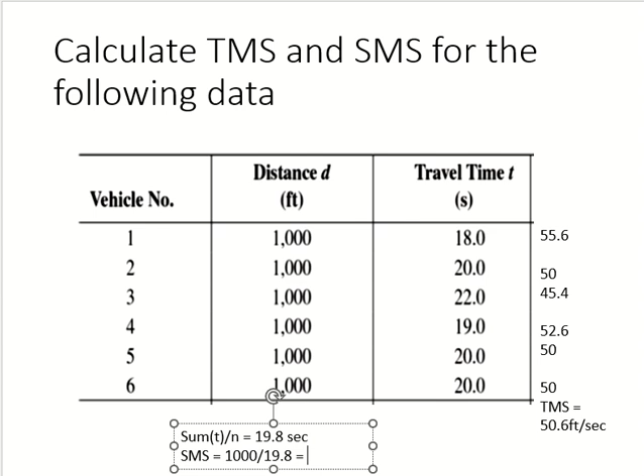How much is this? At last. Yeah. Okay, then SMS is distance upon this value, which is how much? 50.43. Okay, any problem? Any problem? Picture is clear, huh? Very good. This could be one of the problem.

Okay. So you see here, one of them is higher, the other one is lower. This is default. Okay, which one is higher? TMS is higher, right? This is default. TMS is always higher. Okay. Which one I said is at a point? TMS. Okay. So it's supposed to be higher because SMS considers the entire section. It is supposed to be higher.

Okay. Now, here you see for SMS, we did the summation of time upon n, right? And then we did distance upon that value, right? How much is the distance? 1,000. Why did we take 1,000? Because, yes, all vehicles have the same distance, right? Same section. Okay, yeah, it's the same section.

But for TMS, I can give you any distance because for TMS, for every vehicle you will calculate the speed separately and then you will do the mean. So this one can be 1,000, this one can be 2,000, this one can be 900, 500, anything, right? It doesn't matter because everything is going into the equation. Okay?

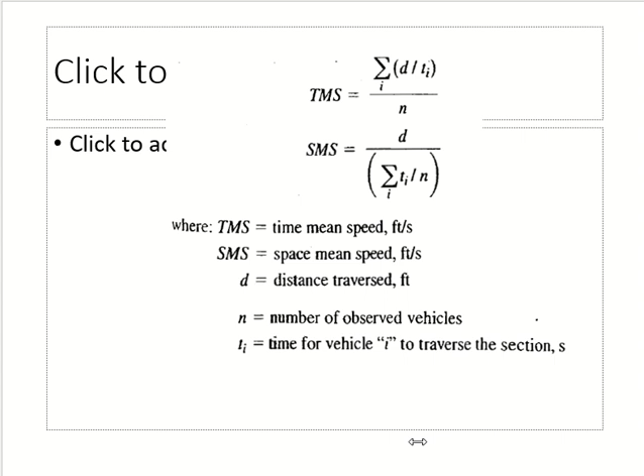Whether you are doing the first method or the second method, it should give you a different answer, although the values are same. N is same, t is same, d is same. But just flipping, doing average first and then summation, or summation first and then average, should give you a different answer. So here it is because of the equations we are using, but practically SMS should be lower, TMS should be higher because of the variation of speed in the section.

Clear? There is a case in which both of them can be exactly same. What is that case? That every vehicle from start to end maintains the same speed. So the first vehicle is 55.6, right? From 0 feet to 1000 feet, at no point it goes above or below this value, and then all vehicles do the same, then both these values will be exactly same. Clear?

If it goes above what? The speed or the distance? Whatever speed it started with, it does not go above or below. It just keeps the same value from start to end for all vehicles. Then the TMS and SMS can be exactly same. Otherwise, there is no other case. Clear? And which one did I tell you was higher? TMS.

Then we come to another macroscopic parameter, which is density. How do we define density? Give me the definition of density. Mass over volume, right? So, for traffic, our mass is vehicles and our space is road. So instead of mass over volume, you would say vehicles upon length of the road. And the length can be in kilometers or miles. So, vehicles per kilometer or vehicles per mile.

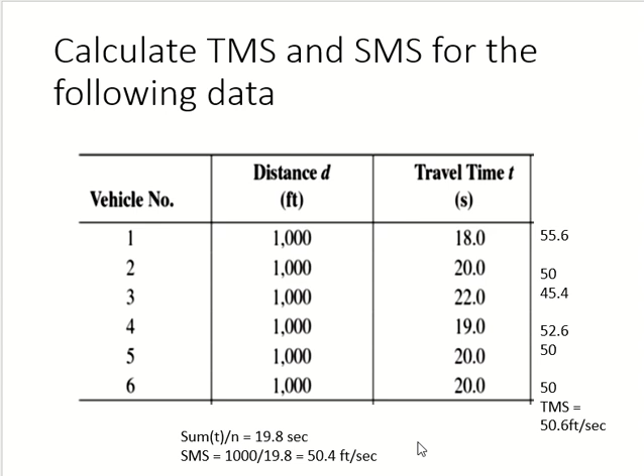Which microscopic parameter we discussed? We did one example, right? In the example, we calculated what? The speed of each vehicle, right? So these values, 55.6, 50, what is this? The speed of one vehicle. So this is micro. Which one is macro? So until you did this, these values are micro. Clear? So speed as microscopic is already covered.

Now we are moving to the second one. Speed is the only parameter we will cover for one vehicle. The remaining 2 which we will discuss now are for a pair of vehicles. First one is spacing and then headway. Both of them are for a pair of vehicles. Now what do we mean by a pair? Pair means 2 vehicles in the same lane following each other.

So 2 vehicles going together side by side, for traffic analysis, is not a pair. Clear? One vehicle is going, then we have a truck, and then after the truck there is another car. So the pair can be the vehicle and the truck, or the truck and the car. It cannot be this car and that car, because they are not following each other. So pair means they have to be in the same lane and one after another. Consecutive.

Now, if you have a pair of vehicles and you measure the distance between them at any point of time, this is called spacing. Spacing is the distance between a pair of vehicles. Now, in this distance, the length of the vehicle is included. So we have to measure it from the same point. What do I mean? So you start measuring the distance from the bumper.

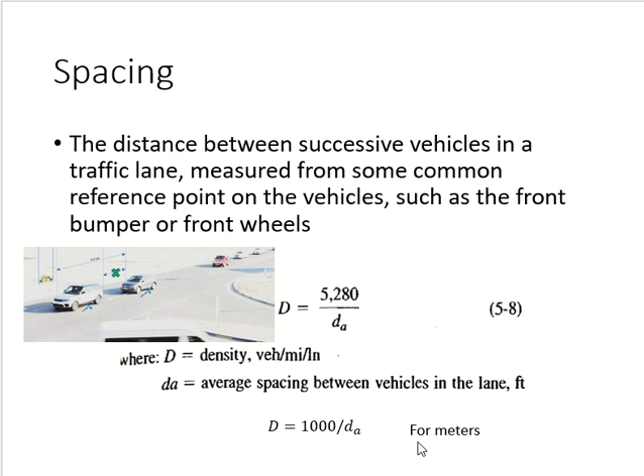Now in this course you will see we will be using macroscopic parameters. Microscopic parameters are very rarely used, especially in traffic engineering, so we will not be talking about them throughout the course. So I will tell you what is the need of having microscopic parameters. There are two main reasons. I am talking about headway, spacing, and the speed of individual vehicles. Why do we need them? One reason is to do these calculations.

Okay, you can calculate density from spacing, you can calculate flow rate from headway. So I need flow rate, but I cannot count it. I can find out headway and do the calculation. I want density and I cannot count it. I already told you, I can do the spacing and calculate density. Clear? So one reason for microscopic parameters is to find out the real thing which I want. Okay, one reason. Second reason is to study individual behaviors.

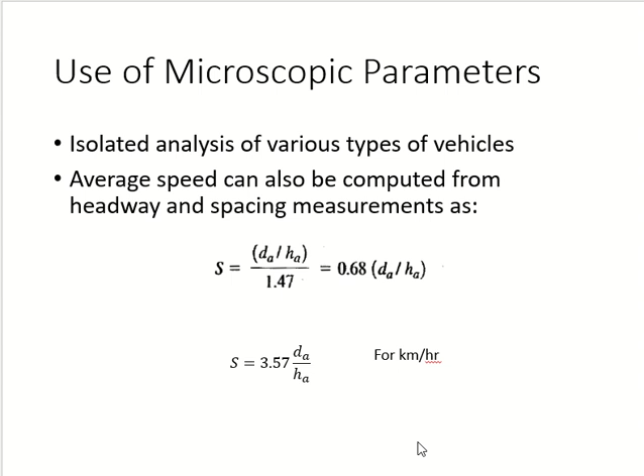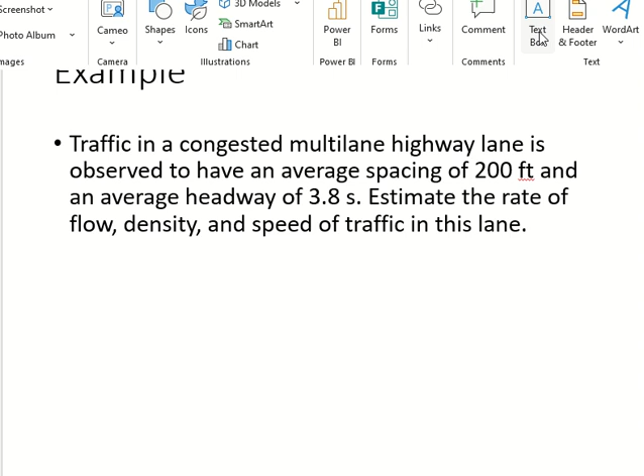Let's say we have a congested multi-lane highway. Average spacing is given, average headway is given, and we have to find out the rate of flow, density, and speed. Density was the inverse of spacing with this factor. So spacing is this. What is my density here? 26.4 vehicles per mile per lane. Okay, flow rate. It was the inverse of headway, right? So the factor and 3.8. How much? 947.3. Any problem? Okay, and the speed was what?

So spacing is 200, headway is 3.8. I need the conversion factor. How do I write it? Yes. 35.8. 35.8. Okay? Clear?

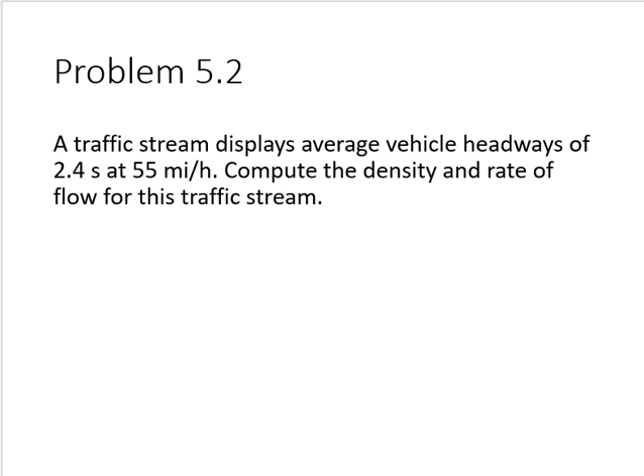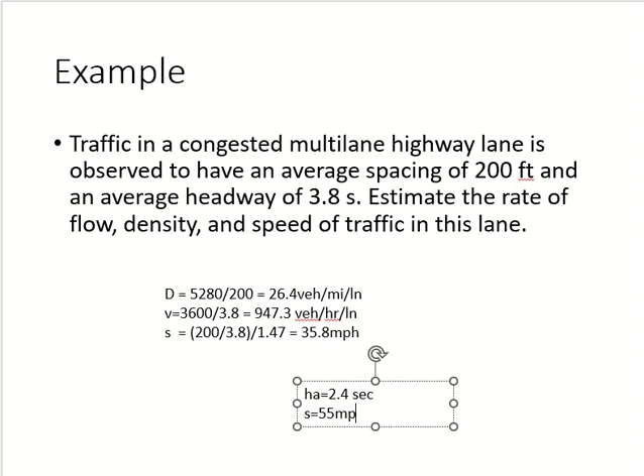What about this one? We have the headway and we have the speed. They're asking for flow rate and density. You have the three equations in front of you. The headway is 2.4, and the speed is 55 miles per hour. Now tell me the flow rate and density. You have to use the same equations. The headway 2.4, and the speed 55 miles per hour. So what will be the density, and what will be the flow rate?

You calculate density directly? The flow rate is 1,500 vehicles per hour. Okay, and the density is? Very difficult question, right? Don't complicate. We multiply them and plug it in the equation. Very good. For the density, we have this speed given, right? And we'll find out what's the spacing. 27.2. Yes, 27.2.